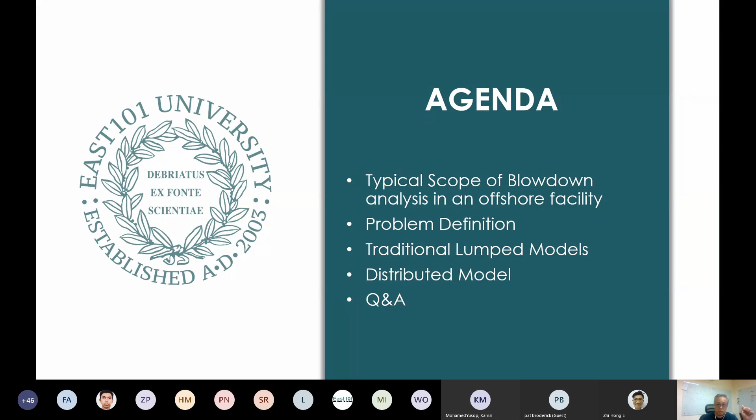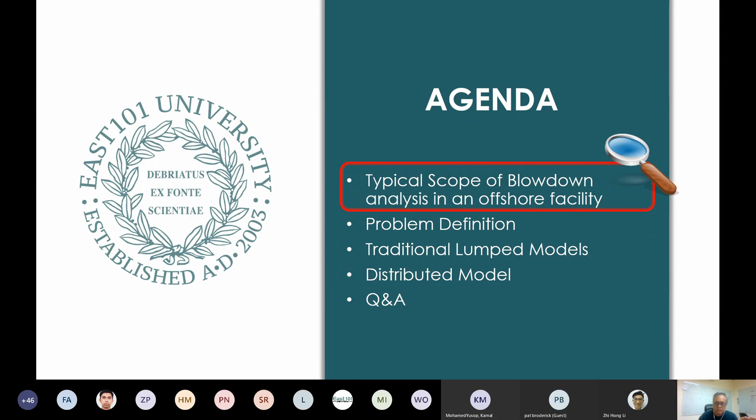So the first thing I'd like to do is to talk about the typical scope of blowdown analysis in an offshore facility, because this is applicable for the analysis that we're doing. This example that we're doing over here is for an offshore facility.

So why do we need to do these cold blowdown analyses? Cold blowdown analysis, in summary, is essentially taking a look at a closed volume or a closed system. In this particular case, we're looking at a fuel gas import system which has been shut down, and there's some trapped gas in that system at a high pressure. What we'd like to do is blow that system down and then take a look at the temperature profile across the system.

So the objective is to determine the minimum metal temperature for all the piping and the equipment within the system. When this is done at the design stage, this temperature would generally be used as the minimum metal design temperature. If this were an existing system, this analysis would be used to determine if a particular blowdown strategy might result in a temperature which may breach the minimum metal temperature.

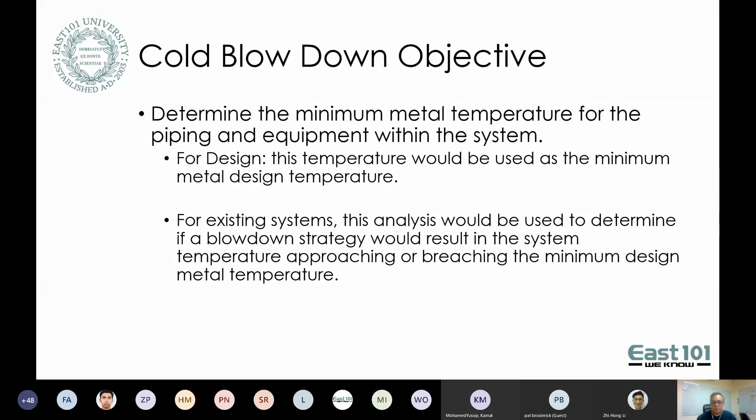Perhaps you've got some infill drilling, and you're bringing a new hydrocarbon source into your facility. So you'd like to take a look at if there are going to be any potential issues with this new hydrocarbon source with new hydraulics and new compositions. We've done these analyses for both existing facilities and grassroots, new facilities.

In this schematic, I'm presenting your typical setup for an offshore hydrocarbon production facility. Let me see if I can get my laser pointer on. We start off at the wellhead and go down to the production separator. These two areas are going to see a lot of high pressures. And as you go further down, in your gas compression system, this green section, you'll typically see high pressures as well.

Down here, you start following the liquid train. The purple is the oil train, and the blue section is the produced water train. For this particular analysis, the cold blowdown would be applicable for these sections in red, the high pressure sections: pipeline, wellhead sections, risers, and the production separator.

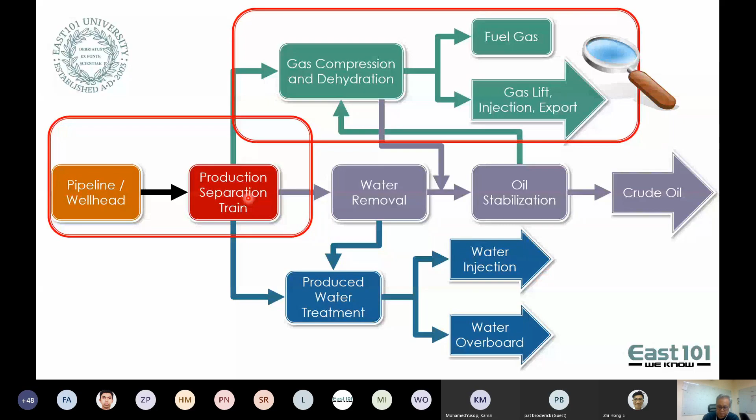Now, the FPSO in this example has something called a turret. I'm not going to get into this, because I know just enough about marine architecture and marine vessels to be dangerous. This turret is a very complex device. It allows the hydrocarbons to be transmitted onto the processing facility while allowing for movement of the vessel. So it's a fairly complex structure.

For the FPSO companies, generally, their major proprietary bit of information is how these turrets and the swivels within the turrets are designed. Within the turret is a device called a swivel, and this acts as an interface between the hydrocarbons coming in and the topside.

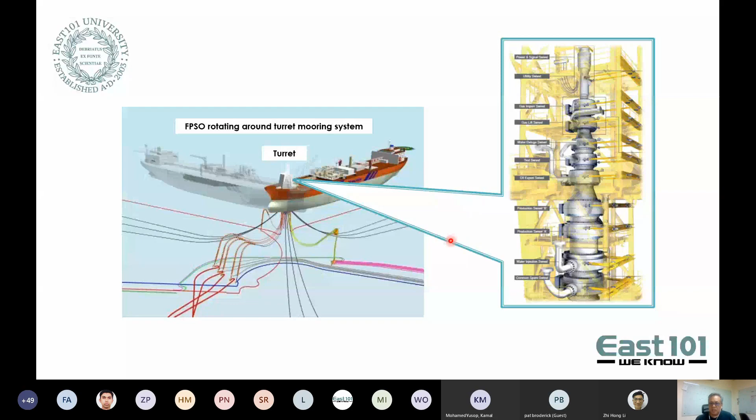So again, I know just enough about the mechanical aspects of this to be dangerous. So I'm sure there are people from the FPSO organizations that are better versed in the workings of these turrets and swivels.

Okay, so the problem is as follows. So I've taken that picture and kind of reduced it to this schematic. For this particular system, fuel gas is imported from another facility. So the fuel gas is essentially piped in through an infield pipeline, and it's one of the many lines that come through the swivel.

So this area here is essentially the fuel gas section, consisting of the fuel gas riser. We've got a shutdown valve here that goes into the swivel. From the swivel, it goes into the fuel gas heater, metering, and then to the consumers. So this is the section that we're interested in. We're looking at the volume between ESDV 001 and SDV 002.

So the starting point for this is: this system is essentially constructed in a cold climate. So the minimum ambient temperature is -8 degrees Celsius. So this obviously is not in the South China Sea. And the settle-out conditions over here are about 150 bar gauge, and it's desired to depressurize the system to about 6.9 bar gauge. So the starting point is based on an isochoric constant volume settle-out. And this is the initial state over here. So this is the problem that we're looking at.

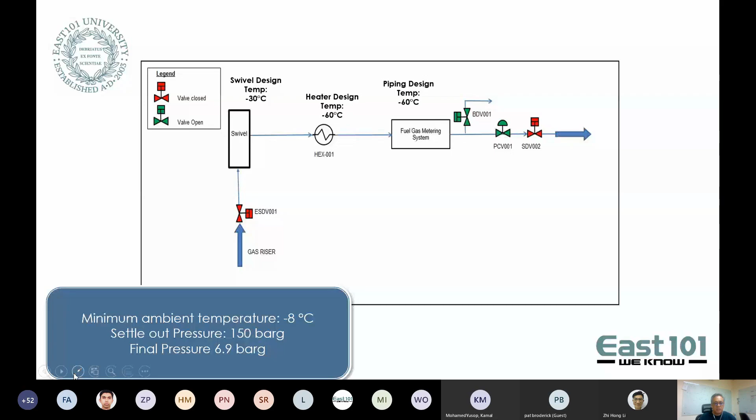Now, if we take a look at the swivel section here, as I've shown you, the swivel essentially consists of several types of toroidal structures. And if I just simplify this, for all intents and purposes, we can look at the swivel as a structure which has different wall thicknesses or metal thicknesses. So we're taking a look at all the various segments within this swivel. It's kind of like several donuts or toruses stacked in a structure. So the various structures essentially yield different wall thicknesses.

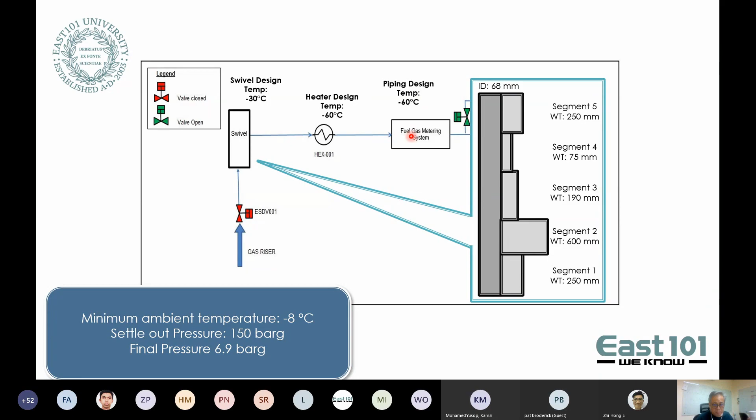So the issue that we have over here is the swivel design temperature is -30 degrees Celsius. Downstream of the swivel at the heat exchanger and the fuel gas metering system, the design temperature is much lower. It's about -60 degrees C. So it's a low temperature design. So let's go to the next slide.

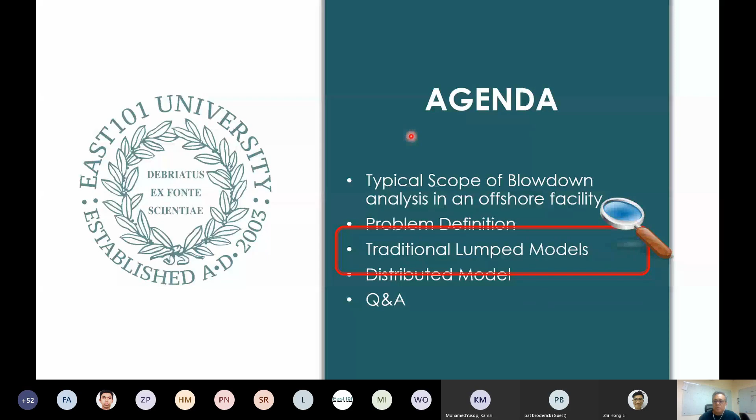Let's take a look at how this would be done traditionally. So I'm going to bet, looking at the list of the attendees, about 80 to 90% of the people attending this have used a lumped model, or if you're using HYSYS way back then, the dynamic depressuring model. Or if you're old enough to remember HYSIM, they had a built-in pseudo steady state model. So how would we typically model this?

Well, using the lumped model, we take a look at all of these volumes, all the metal weight, all of the metal area, and we'd lump that in a single vessel. So we take all the equivalent volumes and lump that as a volume. We take a look at how much metal there was to come up with a total metal weight. And then we identify a wall thickness based on some conservative wall thickness, so you might choose the thinnest wall. So what you end up with after you lump all of these things is a very, very long separator with the equivalent metal and surface area for heat transfer as in this system. So this is traditionally how you do it.

And like I said, if you started your career in the 80s or 90s and you're using HYSIM, they would do some kind of pseudo steady state step representation. Later, when they came up with HYSYS, they started using the dynamic engine with all the integration to solve for that. But until about 4 or 5 years ago, these models were just based on a single volume.

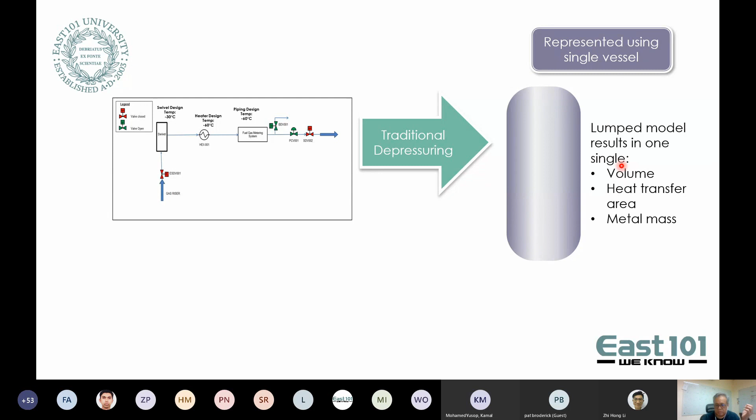And based on this analysis, the results were as follows. Starting at an initial temperature of -8 degrees Celsius, if you were to depressure from about 150 bar to about 6.9 bar, we find a minimum hydrocarbon fluid inventory temperature of about -41 degrees Celsius. And it yields a minimum wall temperature of about -23 degrees Celsius. So if I'm designing this facility, I'd be a bit concerned because I really want to know where those low temperatures are going to be.

Second, because I'm kind of lumping and I'm averaging volumes and things like that, these temperatures might not really be indicative of the actual temperatures that I might encounter. So this is the issue. With this lump model, I don't know spatially where this low temperature is going to occur, one. And two, I'm not sure that I can trust or feel confident of the number that gets calculated because of all of this averaging. So that's a problem that I have.

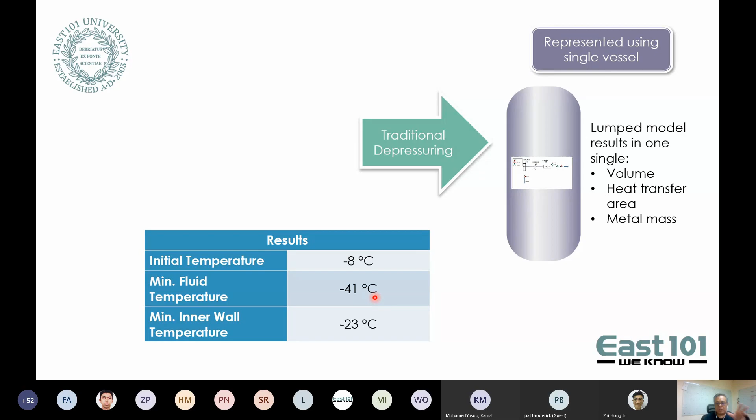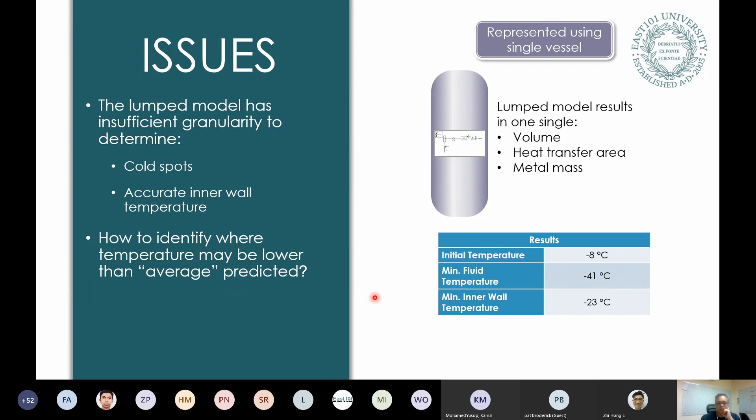Yeah. So I can't see the cold spots. I can't get the accurate inner wall temperature. How am I going to identify where the temperature might be lower than the average temperature predicted? Yeah. And I'd like to know also, across my system, is every temperature point spatially across the system going to be above the minimum design temperature?

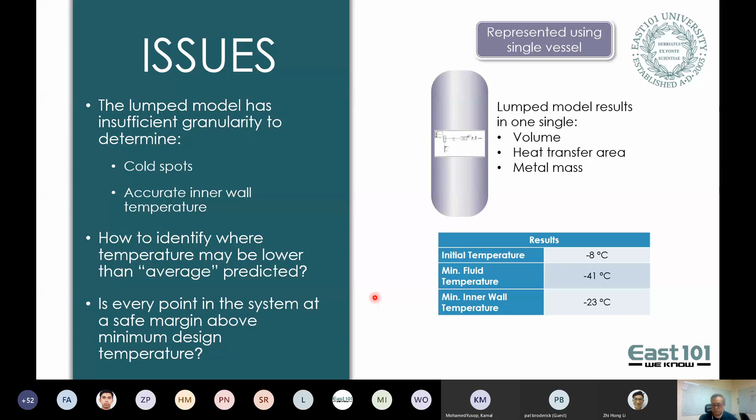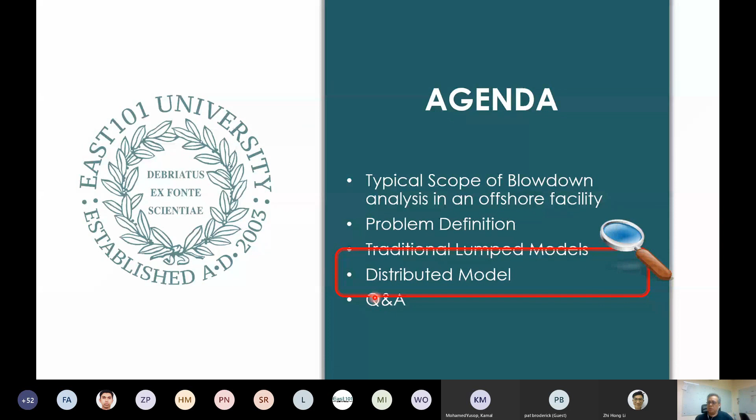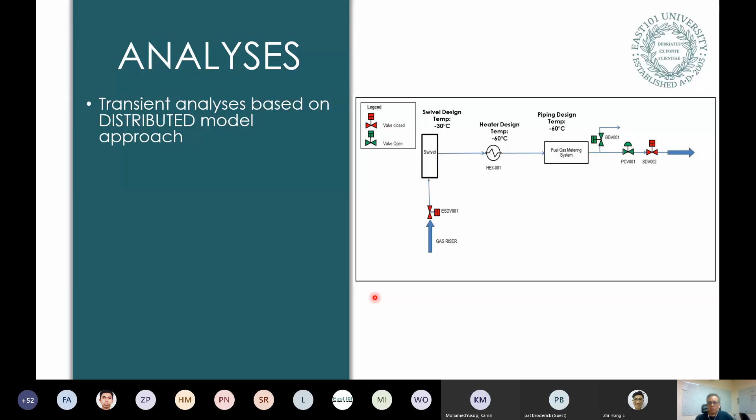Okay, so now here comes the distributed model. So this was built quite some time ago, but we still use this for our analyses. And what we're looking at is a transient analysis based on a distributed model. What we mean by this is we essentially account for every piece of equipment, the piping inventory, pressure drop, and heat transfer. Next slide, I'll get into a bit more detail about that.

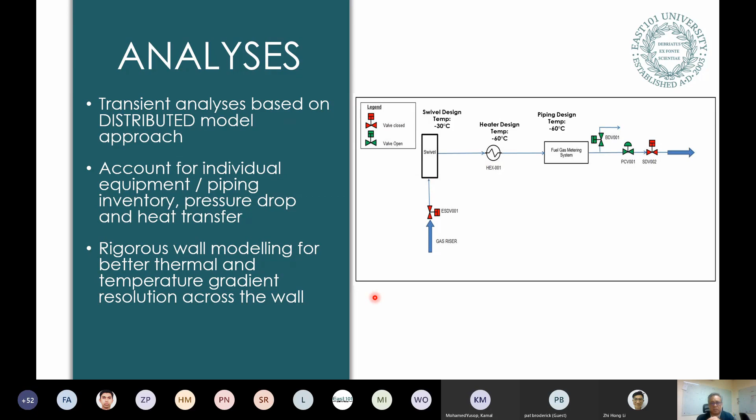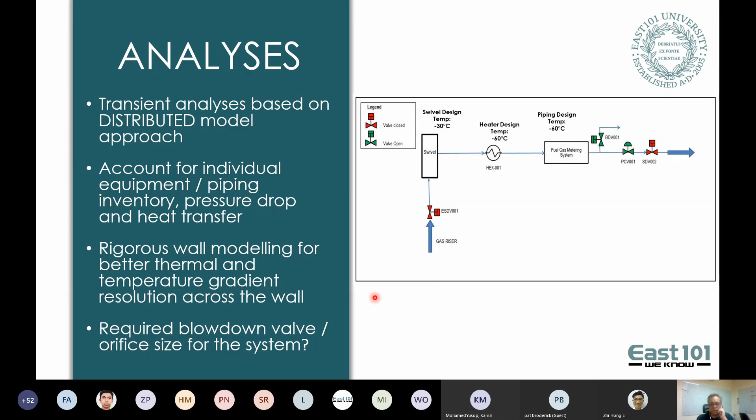We've also done some rigorous wall modeling to better account for the thermal gradient across the wall. If you take a look at most of your simulators, particularly HYSYS, Unisim, Symmetry, VMGSim, you might be able to put in wall layers, but you might not be able to get a very detailed temperature gradient across your wall. Yeah, you can put in different insulation across your wall. Another thing is, we also did a check to take a look at the sizing of the blowdown valve in this particular case, but I won't be talking about that in this analysis.

Okay, so for this strategy, just to give you a bit of background, in this case we used HYSYS as the main simulation environment. I'm not sure if there are many HYSYS or Unisim or Petrosim users. They're all coming essentially from a very similar source code. But this family of products is essentially built to be extensible and programmable, meaning you can bolt in. If you've been to some of my previous webinars or trainings, one of the things I talk about is customization of the HYSYS family environments.

It's highly customizable. You can add your own Visual Basic code, or you can create your own applications using any of the Microsoft Visual Studio tools, or even Fortran. You can wrap up your subroutines as dynamic link libraries, DLLs, and you can call them within HYSYS. So in this case, we used HYSYS as a basic framework, and we used HYSYS Dynamics. We used some of the native HYSYS objects, but we reprogrammed those objects. So we used our own custom heat transfer equations.

In some cases, the heat transfer granularity at that point in time was not very rigorous. So we wanted to take a look at heat transfer between phases, and also heat transfer from a convection perspective, both free and forced convection. At that point in time, the built-in heat transfer model, particularly for some of the vessels or some of the other objects, did not take into account forced convection.

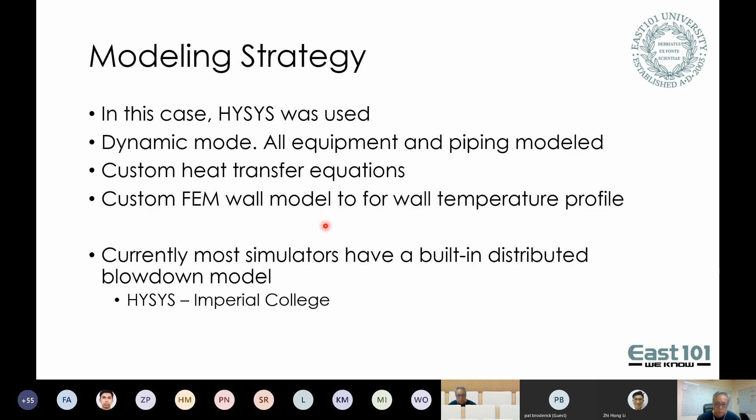So that said, we still prefer to use our own model for this, mainly because I can see all my equations, and I feel confident when I can see my own equations. So we tend to use our own code for this particular type of analysis.

Okay, so this is kind of what it looks like. So this is just a bit of a snapshot. I'm not going to go into much of the code, but as you can see, we're using HYSYS objects. So we're using HYSYS vessels, HYSYS pipe objects to represent pressure drops, vessels for us to bolt on some of the heat transfer equations. If you take a look inside these vessels, we're using a spreadsheet in this particular case to do some of the rigorous heat transfer coefficient calculations.

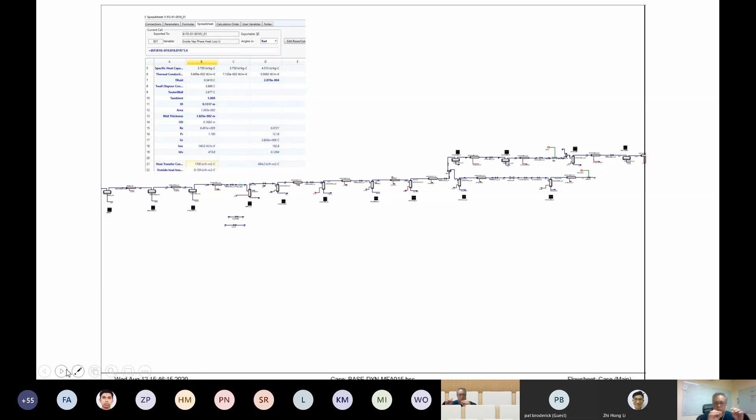So in this particular case, we look at free and forced convection. That's where we're calculating Reynolds numbers, Prandtl numbers, Grashof numbers. So it's getting a bit more granularity on that. Again, in this particular case, we really needed to get as much resolution as we could on the temperatures.

Okay, so if we take a look at the case now, after we built the model, which is the hard part, and after we've tuned the model, we've done stability checks. Then we took a look at the system that we had here from this particular FPSO, and we were monitoring. The first thing that we did was look at the temperature profile as we came from the riser all the way to the consumer. So the battery limits were essentially these shutdown valves, the isolation valves. So we've numbered all of these points, point 1 to point 8.

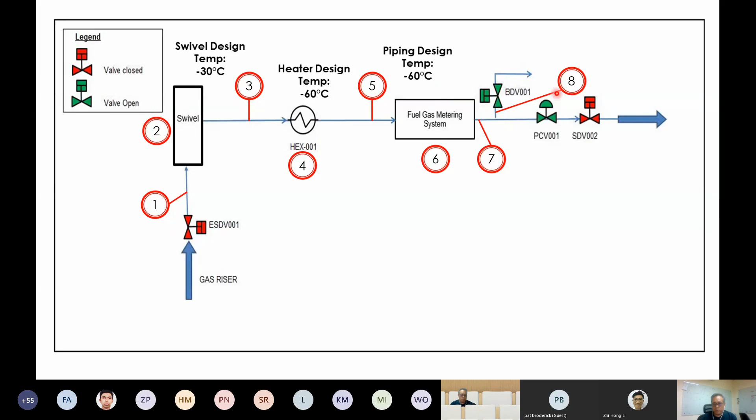And this is what it looks like on the graph. So this graph isn't from HYSYS. It was post-processed. We collected all the information from all the strip charts in HYSYS, and then we bolted that into a spreadsheet, and we put in a bit of an animation tool so we can demonstrate this to the customer. So you can see all the sections over here, section 1 all the way up to section 8. Bear in mind that over here on the swivel section, I've got a design temperature of minus 30. Everything beyond that is minus 60.

So I'm plotting two things here. Again, I'm starting from an isochoric settle out. I'm settling out at constant volume, meaning I'm simulating that I've got the system isolated, and I'm allowing the hydrocarbon inventory to come into equilibrium with the ambient temperature of minus 8 degrees Celsius. So I'm starting at minus 8. The red line is the fluid temperature, and the blue line is the inner wall temperature. So I'm going to go ahead and start this if I can.

Okay, so I'm starting the sim. I'm blowing down from 160 bar gauge down to about 6.9 bar gauge. And you can see the fluid temperature start to drop as you're seeing the expansion of this fuel gas. And you're also seeing the Joule-Thomson effect as this goes across the system from point 1 to point 8. Notice the blue line over here. We're not seeing too much of a drop in temperature because this blue line is the inner wall temperature. So it still has a lot of heat in there; it's essentially still a heat reservoir.

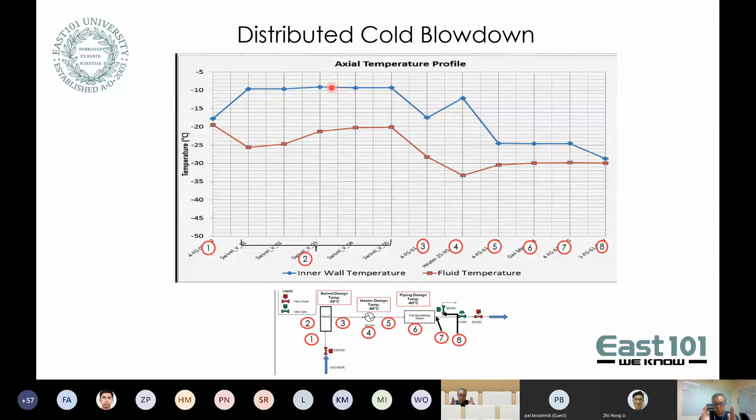Another thing I'd like to do is, again, because we weren't sure where we were going to see these temperatures, initially we see they're not really occurring over here. Over here, in the swivel, we just wanted to get an idea of what kind of temperatures we'd see in the swivel wall. So what we did was we built a rigorous wall model for segment 4, which is like the thinnest slice of wall.

And we wanted to see how low the temperature would go, and what its response would be to the blowdown. So on the left-hand side, this is my hydrocarbon fluid. And on the right-hand side, this area here is my ambient section. The ambient temperature is minus 8 degrees C. So for this analysis, I'm going to start the blowdown again, and I'm just monitoring the metal temperature.

This analysis essentially was done with the previous axial temperature profile calculation. So let's take a look at what happens when we blow this down. You can see the inner wall temperature starts to drop quickly, but there's still quite a bit of heat capacitance in the wall, so it takes a while for the rest of the wall to see this. If you had a temperature gun aimed at the outside, you'd still see about minus 8. Now we can see that the temperature of the fluid is starting to affect the outer wall temperature.

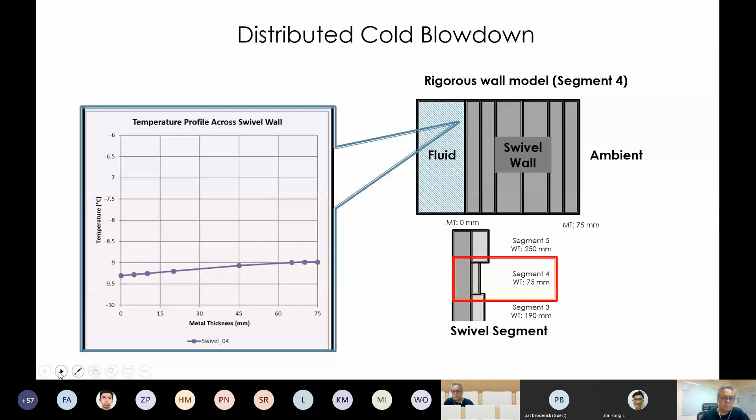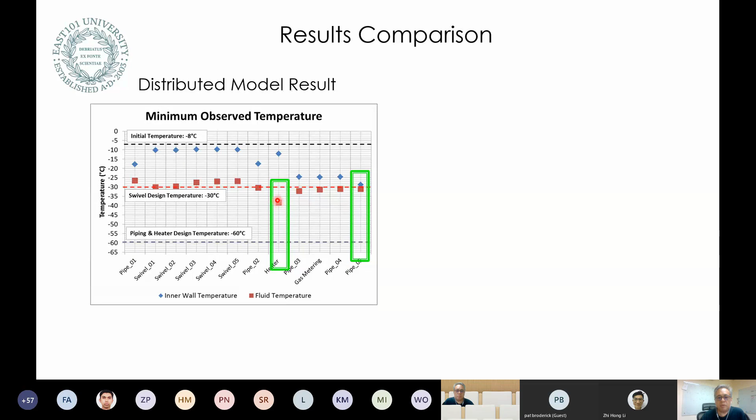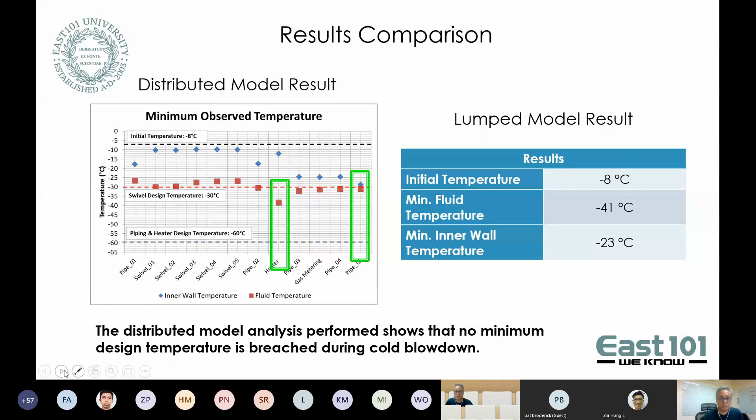Okay, so just to summarize, we'll go back to the results. This is a plot of the minimum observed temperatures from the axial, spatial profile. We can notice that the low temperature sections are appearing over here, at the heater and downstream of that. And this is our lumped model result, where we don't have any spatial information. This gives me more confidence, because the distributed model shows that we don't have any minimum design temperature breaching during this cold blowdown event.

So what we can conclude is this kind of analysis gives us a lot more granularity on the temperature and thermal response of the piping and equipment. So we can be sure that whatever design temperature and blowdown strategy we select should be safe, and that we don't see any temperatures falling below the design temperature, leading to potential metal embrittlement.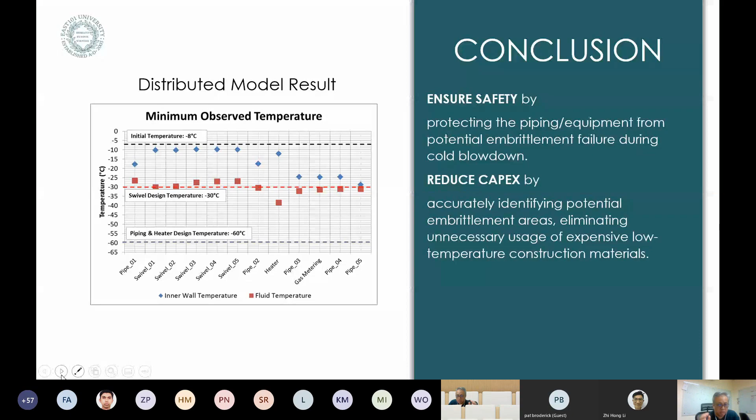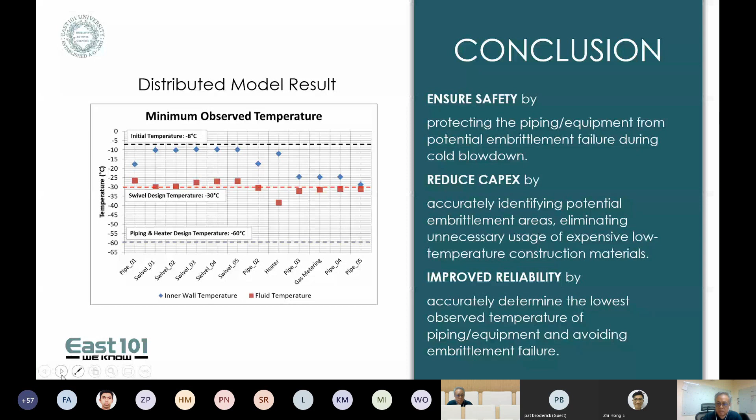Using this analysis, we also have the opportunity to use low temperature material only where we really need it. So we can save on capex when we have visibility on these cold spots. And obviously, we improve the reliability of the system, because when we perform our blowdowns, we know where these cold spots are going to occur. So in a nutshell, that's what we've done for this type of analysis.

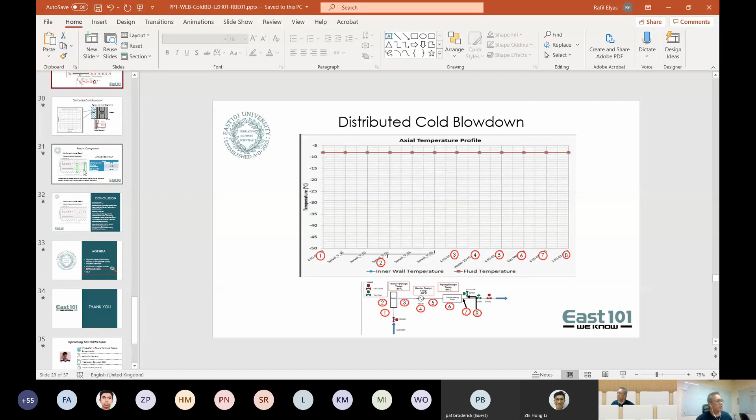Your wall temperature will not reduce immediately. It's going to take a while for the wall temperature to start to come down because the wall's got a lot of heat already, so your wall is kind of like a thermal reservoir. So at point 4, you can see that the metal temperature is a lot higher than the fluid temperature, because in this particular section there's a lot of metal, and that metal acted as a thermal reservoir.

This simulation was just run for a few minutes. It was not run all the way till the end to show equilibrium. We just essentially stopped it at some point. So based on the analysis that we did, this is what we see.

So that temperature from the metal will take a while to come down. Bear in mind, from the wall temperature, you can see that it's still receiving heat from the outside, so we don't expect that temperature to drop too low. So point 4 is not a running heater, the heater is shut down, but there's a lot of metal associated with it, so it's acting like a reservoir. I hope I answered that question.

Next question. Thank you, Zulfan, for the question, and thanks, Rafil, for the answer. Next question from Pat Broderick: Rafil, did you try to run this particular problem through HYSYS Blowdown for comparison?

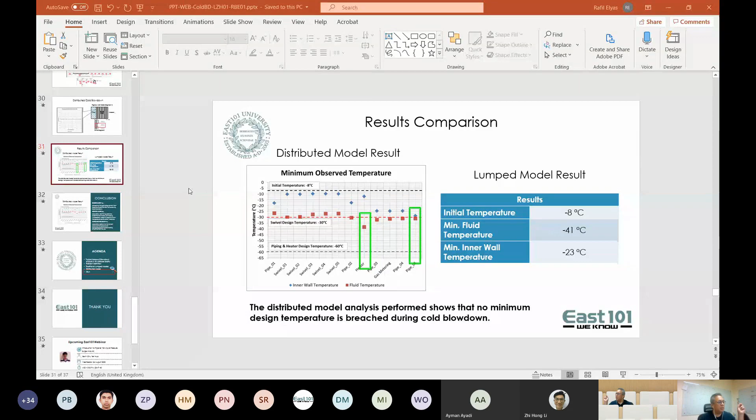Everything else is piping. We did model this as per the design sheet. So essentially what the simulation is going to do is look at the pressure drop. If you have a nozzle, it's going to introduce a nozzle pressure drop, so it's going to calculate the temperature reduction based on the Joule-Thomson effect across that pressure drop. So it would, in this case.